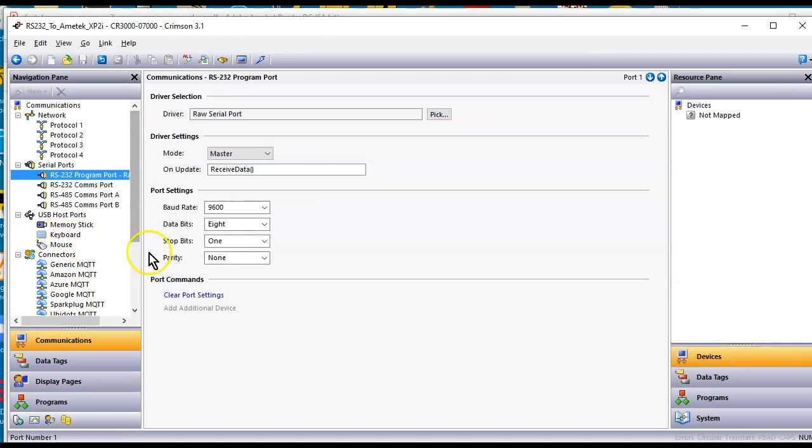If I make this a little wider so you can see it, you can see here I'm using the programming port right here. I've picked the driver raw serial. So under the pick button right here, under the system, I'm picking this particular driver for this raw serial protocol. And you can see I've got 9600 8-1 and none here for my protocol. I've got this set up as master mode; I don't think that matters. And on update, I'm calling a program called receive data.

I want to point out to you here that this particular port, let's see if my arrow tool works today, right here is port number 1. So if I want to send a command out this particular port, I will use a PortPrint command to do such a thing. And then to receive that in, I will use that port number 1 to receive the data, which I'll show you here in a second.

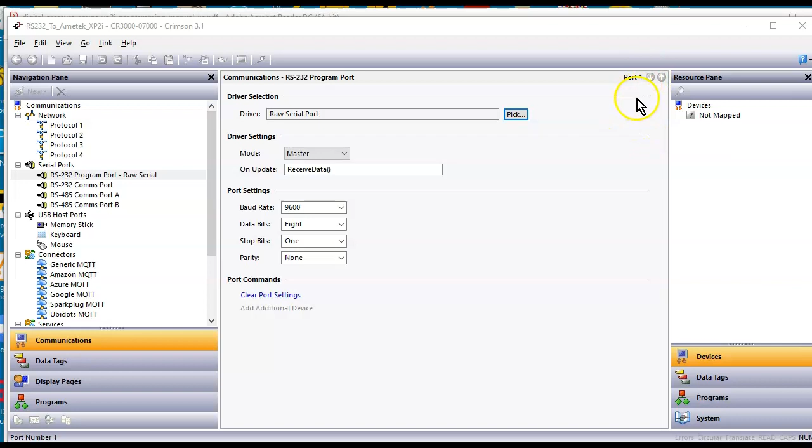So on this application, we've got this up and running. Let me go to the actual web page that's running. If I click the menu button, first I want to show you the wiring. That was our hardest thing to figure out. On all the Red Lion products, the RS-232 port uses an RJ12 connector, a 6-pin old telephone style RJ12 with 6 conductors. Generally speaking, I believe these are the color codes of those, and I'm showing here the pinouts.

The only thing I did different here is that I swapped pins 2 and 3 for the TX and RX coming out of here into here. On this hardware, I used RJ12 cables. I cut one end off, and on the other end I've got a DB9 field wireable connector. This is a wonderful product because it's got the pinouts with the numbers, and I have it wired just as you see right here. The color codes go to this unit on those pins, so that works out great.

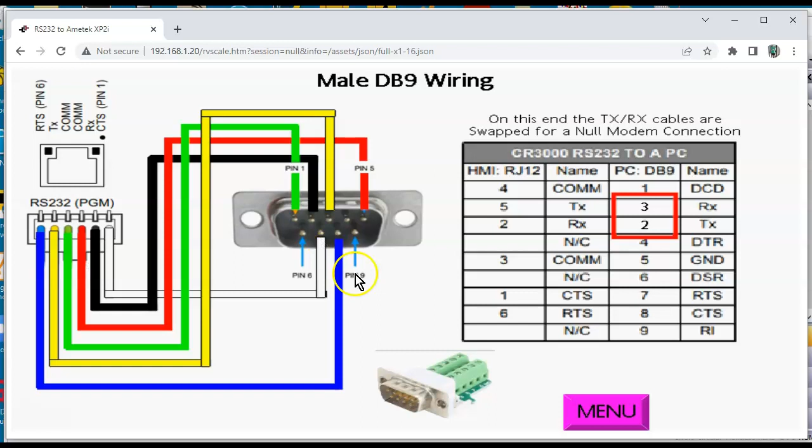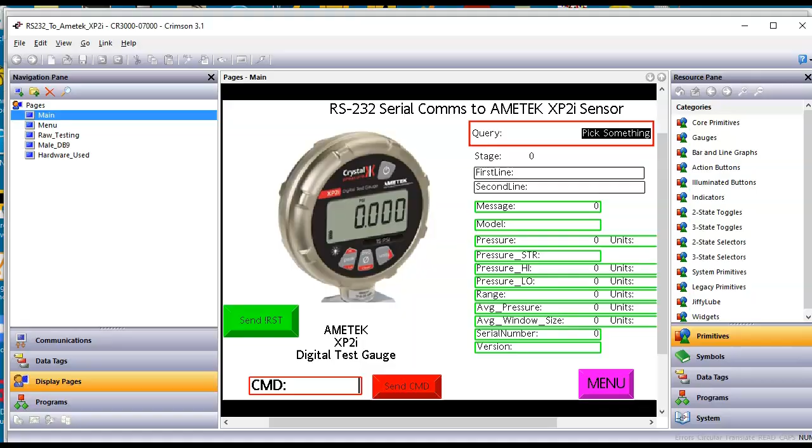So if I go back to the menu here, I've got both a raw testing page and the final result. I started off with this raw testing page because I wanted to see what communications I was getting back and forth from this unit. So in Crimson, over here in Programs, I've got a program called Receive Data. This program will receive data on that port, and this is what's being called over here in communications.

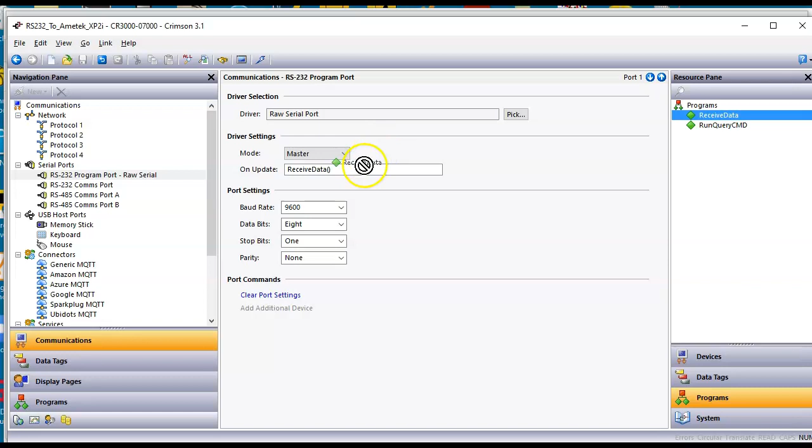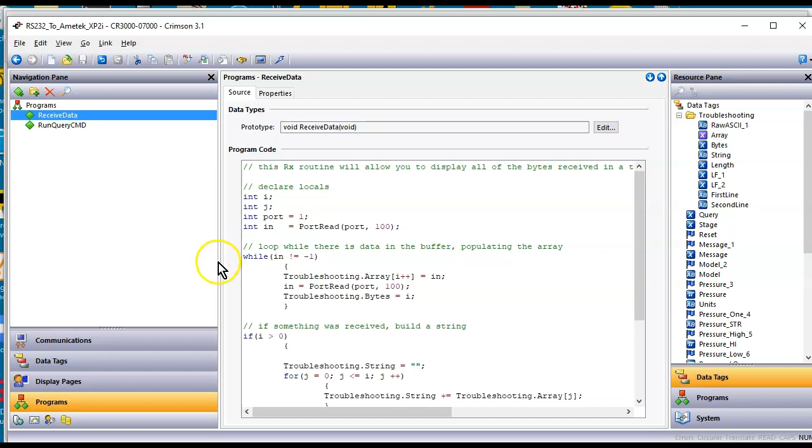Normally, if you attend one of my classes, you know I'm a huge advocate for drag and drop. For some odd reason, this is one of those fields that doesn't let you do that, so you have to manually type the name of the program you want to call. So that's the program it's calling whenever I receive a message. In this program, I'm filling an array and so forth, and then I'm using some methods to find the left and the mid of a string, whatever comes back from this thing.

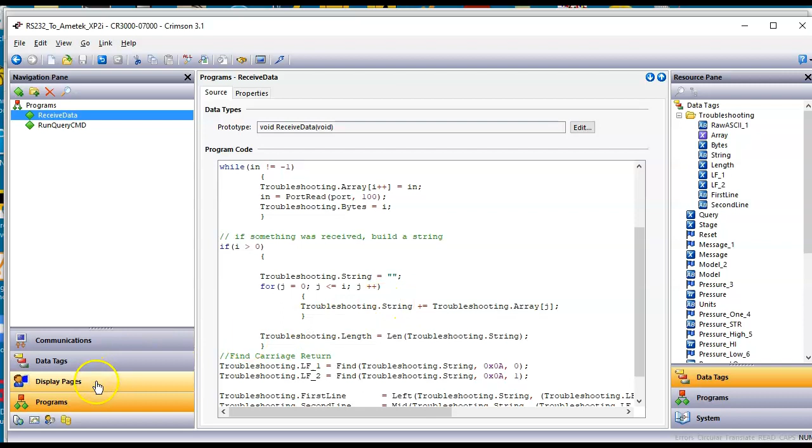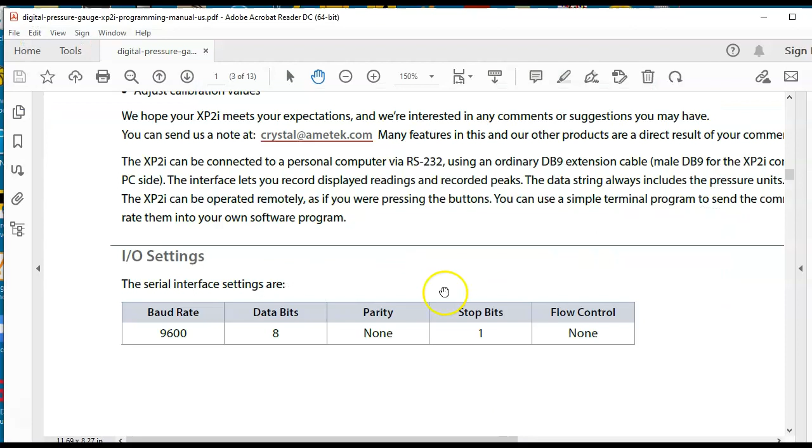Over here in display pages on the raw testing page, if I go to data tags, we have a number of tags, and I have an array tag here that parses all the elements and will show us the raw ASCII format of those when we get them in. So say, for instance, I wanted to inquire a serial number on this unit. Let me go to the manual here and find this.

It's giving you all kinds of nice examples in here, which is really awesome in this manual. So if I'm looking for the serial number, for instance, it gives you an example string: question mark, capital S, N, and a pound symbol here for the serial number. Now, I did find out in testing, they have to be capitalized. It doesn't really say that in the manual here, but any lowercase doesn't work.

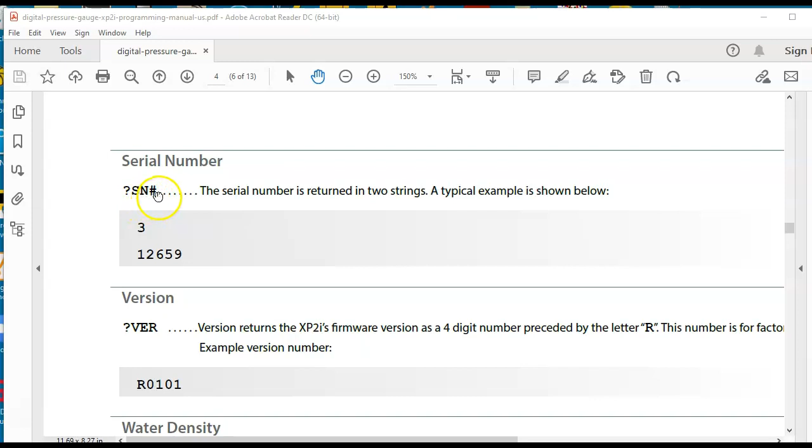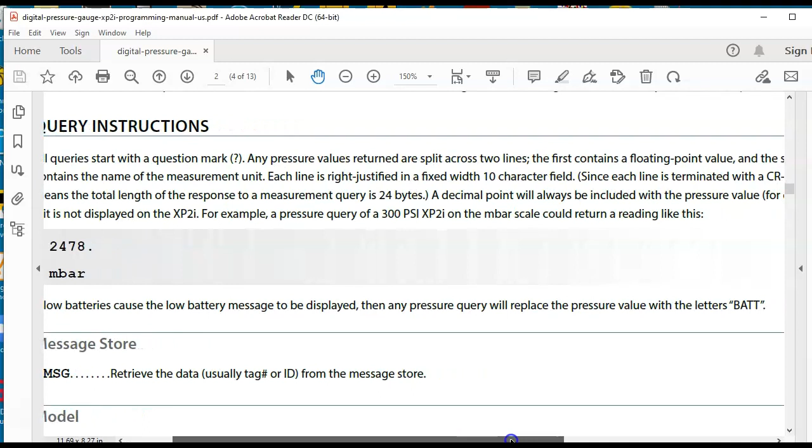So according to this, if I send this a string of question mark, serial number, and pound symbol. Also, let me slide all the way back up here. I believe that up on top here, it tells us that each line will end with a carriage return and line feed right here. Carriage return line feed.

Okay, so if I go back to Crimson, let's investigate this serial number button. So if I go to properties, I want you to see something here. There's the text, no big deal there. If I go to the action tab, look here. I'm using a command called PortPrint. There's number 1, that's the port number. And then here's the string I'm sending. I've got double quotation marks, the question mark, SN pound, and double quotation marks. And then I'm using this \r\n, which is the format for carriage return and line feed.

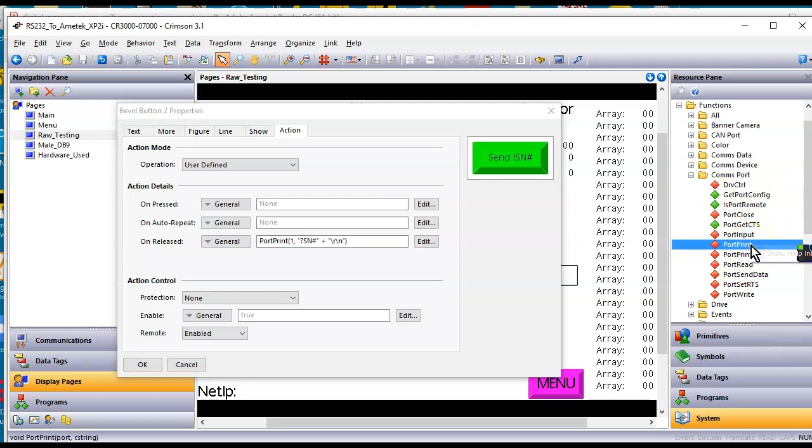And I got this function over here in the lower right corner. Go to System, expand the functions tree, go down to comms port, and here's the port print. That's the command I'm using. Now, you can right click on any of these and it'll show you help info of how it works, but that's what I'm doing there. So let's see if this works. If I go back to the web browser that's running, and if I press the serial number thing here, let's see what we get.

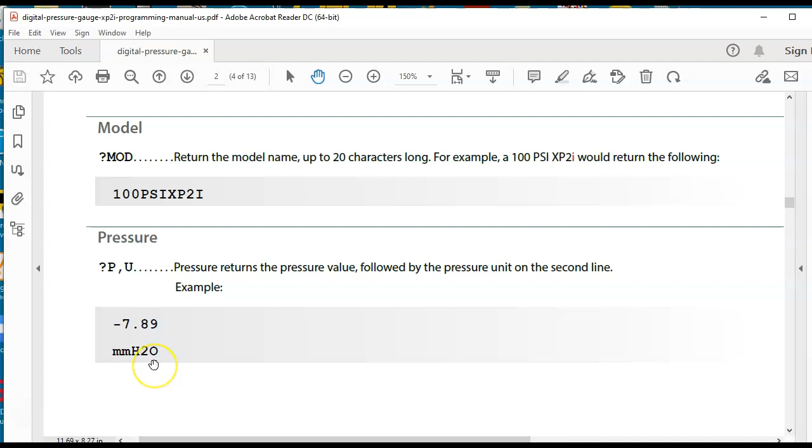Some of the items in the manual, let me go back to where you can see. Some items, like the model number, will give you just one line, whereas the pressure can give you 2 lines, or it'll put it in one single line. One line will put it like that, or like this will give you 2 lines. So it's kind of an interesting product. But anyway, that's what I was using for testing.

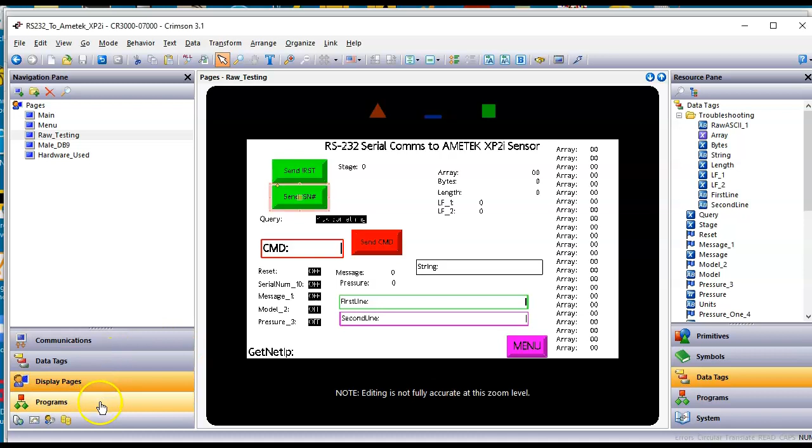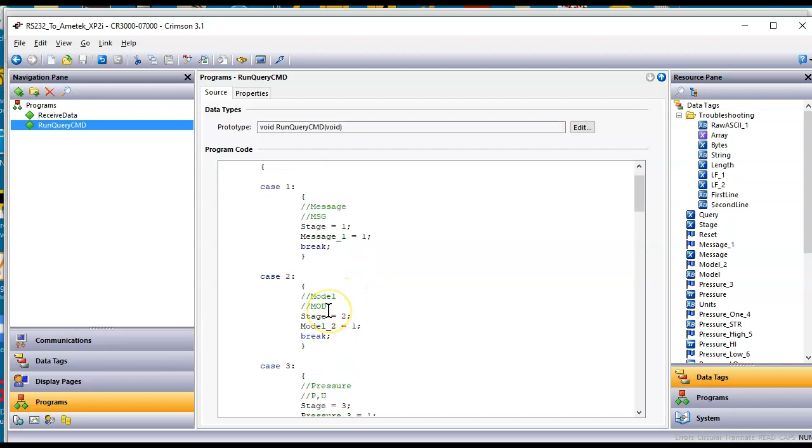Let me go back to Crimson. I started with that to see what was happening, and then I can set off different things here. And I went a little further in this application. Because we have all these different things we can access, I went ahead and created a query kind of command. I have a tag called query, and depending on which one that is, it will automatically determine what I'm going to grab. So for instance, if I wanted to find out the message, I'll set the message bit to a 1. I'll show you that in a second. Or if I wanted to find the model, I have a tag called model2 equals 1. Let's look at that one.

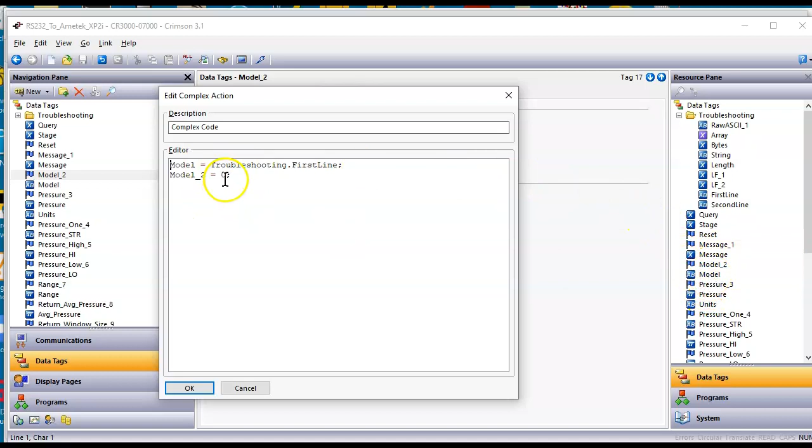So if I go over here to the left and I go to model, this flag tag right here, I want you to notice something. On the triggers tab, when active, I'm sending out a PortPrint command with the question mark and then this mod I put in here, and there's that string. And then down here, 500 milliseconds later, I'm taking the first line of data that comes back and I put it into a model string. Yeah, I picked the string one. So I'm doing that, and then I'm resetting that variable.

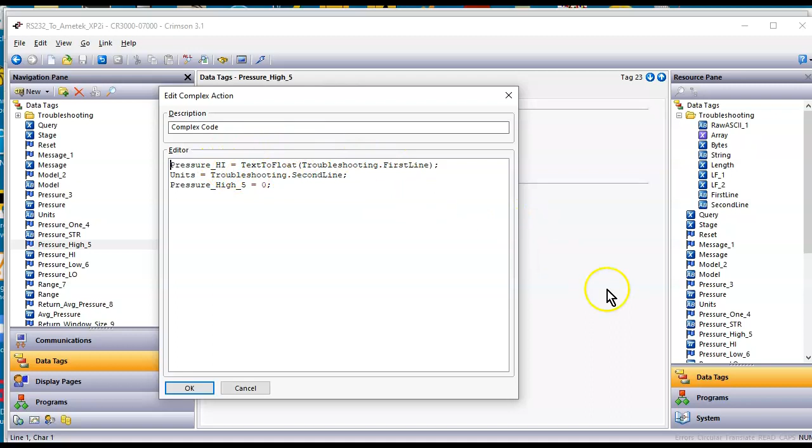Let's pick on another one here. Let's look at the pressure one, for instance. The pressure one actually gives back a floating point number. So on the pressure one, I'm doing a text to float command. I'm taking the first line and putting it into a floating point tag called pressure_high. You can see that over here. That's right here. See the floating point pi symbol; that indicates that that's a floating point number. And then I'm also grabbing units out of there.

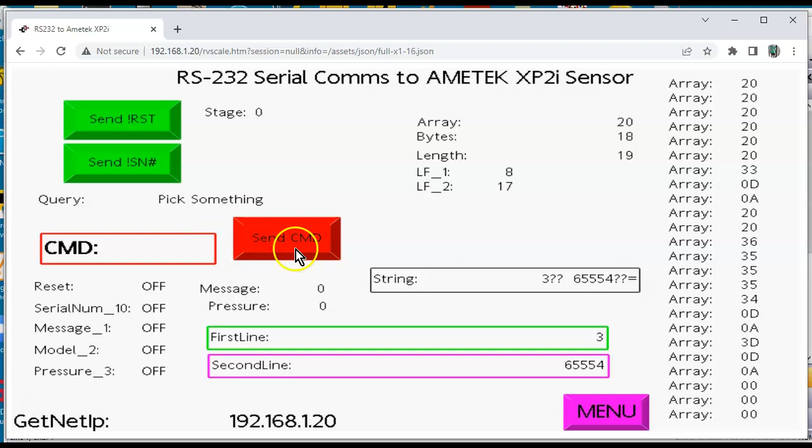So let me show you how this works. If we go to the main page, that was the testing. If I go to the main, here's the query thing. So let's say, team, that I want to query and I want to look at the message.

So if I press the message, I get back some number, 1, 2, 3, 4, 5. I don't know what that means, but that's what I get back from it. There was nothing in line 2, so there's nothing there. Let's go look and see if we can get the model number back from this. So if I go model, look, it fills in with the model. That's the exact model I'm using right here to my left. That's the model plugged in.

If I go down to pressure, let's go to the pressure here. So you can see pressure reads in right here. I don't have anything connected to this thing, but if I take it, and let's say that I blow on this thing, I'm going to blow on it and try to peak the pressure. So let's see here. I'll go here. Here we go. And that time I got up to 0.8.

Let's try something opposite. Apparently I can't increase that much pressure, but I can. Give me a second here. Let me go to pressure again here. Let me suck on it here, and you can see I can get more of a negative draw right there. So that's the pressure there. Whoops, I almost dropped it off the table here.

What else we got on here? Got pressure one line. They do have another one where they just feed it back as one line. And if we go to the next, pressure high. So that's the highest I must have got it while I was testing it there. Oh, did I get my key? What happened to my internet here? Okay, let's go here. Pressure low. There, I got that. That's the lowest I must have got it.

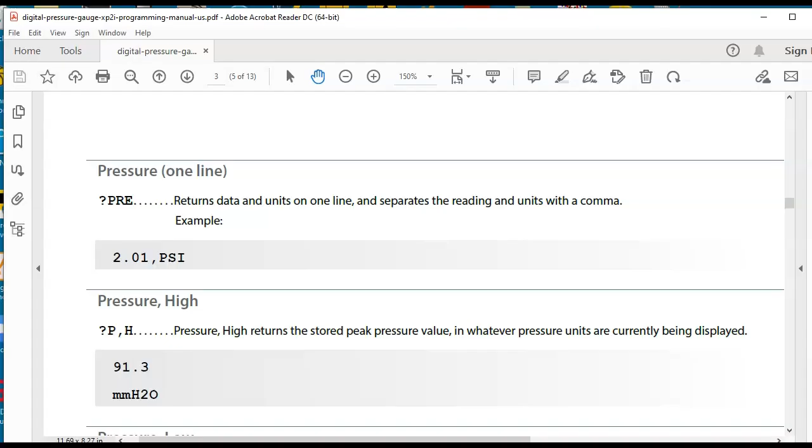Now there are a couple variables you can change in here. For instance, the message number. Based on the document, let me go to the manual here. Let's see if I can find the message here. So there's some commands you can do: clear, disable, enable the display, message store. So if I put an exclamation point message and then some X up to 12 characters here, I can put in a number. So let's say I want to change the message to 8675309, put that in there.

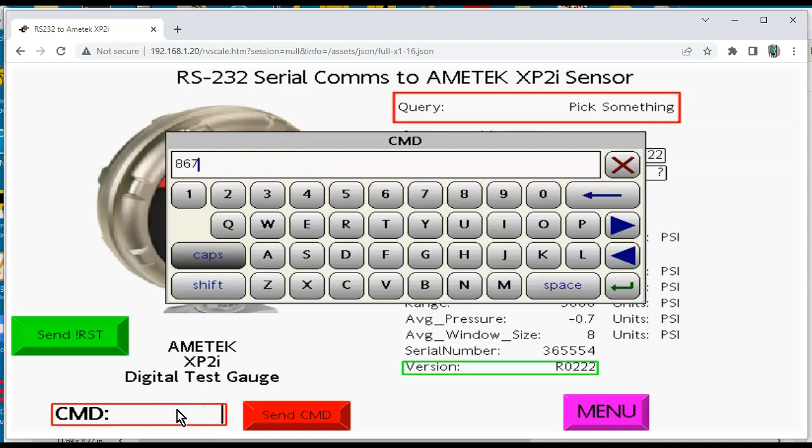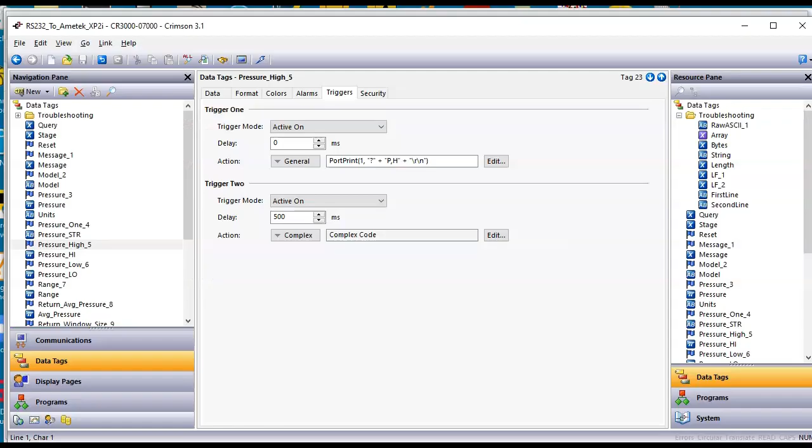If I send that command to it, I get back this A0, which is in the document. It says it supposedly read it correctly. I want to read back the message and see if I get that number here. Let's go to message, boom, and there's the number. So all working great, looks good. And in the database here, the customer can now pick whatever particular tags they want, and they're off to the races. All they have to do to read a certain value is set whatever flag tag it is, and it'll then return that particular value.

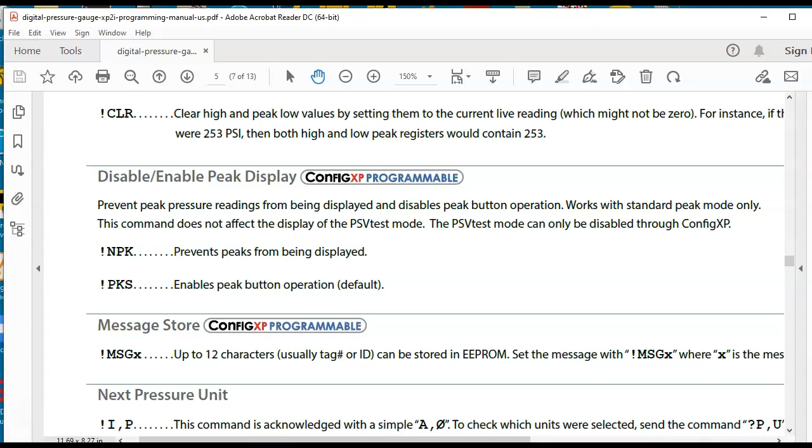So kind of a cool little video concept here, working with RS-232 strings coming out of a device. I want to make another video that's probably a little simpler than this, but this is one with the AMETEK here, RS-232 serial comms. The important thing here is two things. We had to make sure we got the wiring correct. That was battle number one. And number two, we had to get the documentation from the manufacturer to see what are the commands that we need to send over serial to get this thing to work. I originally used PuTTY and a USB to DB9 connector on my PC to test this, but now I've got the Red Lion talking to it, so everything looks good. It's basically we're writing our own driver here.